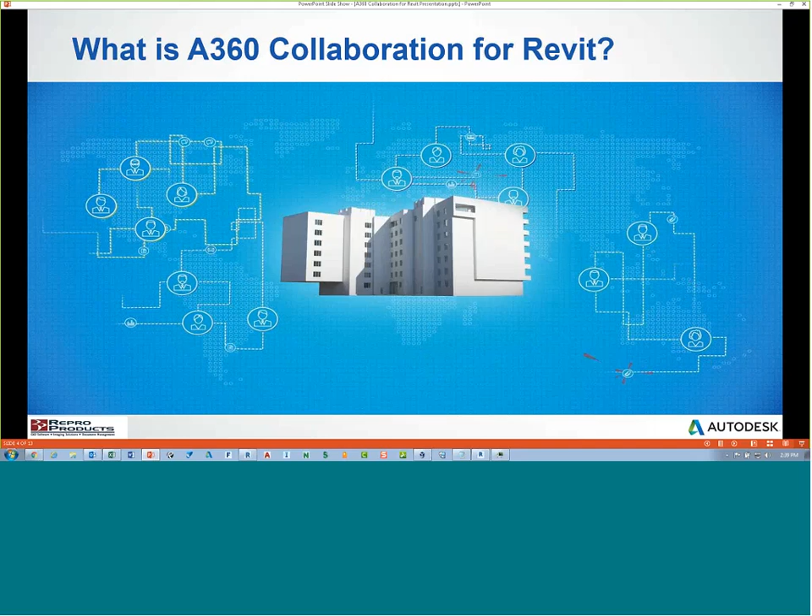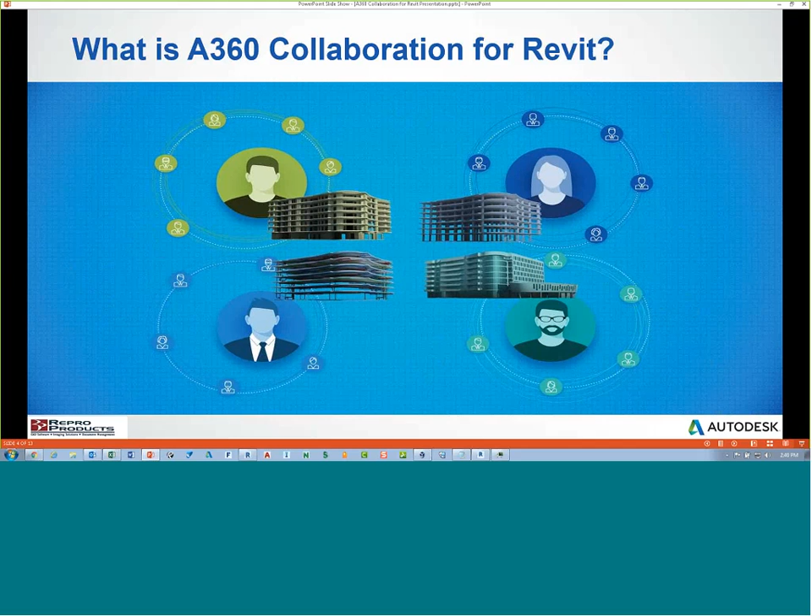There's a new reality to building design. These days, it's more important than ever that architects, design professionals, engineers, and project stakeholders can communicate and collaborate effectively. However, tools like email, SharePoint, FTP, and cloud storage sites create data silos, leading to miscommunication and inefficiencies in project delivery. Design teams need to be able to efficiently work on the same models and also share models and designs with the entire team, including non-Revit designers such as project managers, principals, consultants, and clients. But until now, the challenge has been how to do this effectively.

Collaboration for Revit plus BIM 360 Team is the solution. With Collaboration for Revit plus BIM 360 Team, project teams can work more effectively using a design process that brings everyone together in a single central workspace to collaborate and perform real-time design reviews. Collaboration for Revit plus BIM 360 Team allows whole teams, from consultants to clients, to be in the design loop from wherever they are. This access speeds review cycles so iterations can happen quicker and projects are delivered more efficiently.

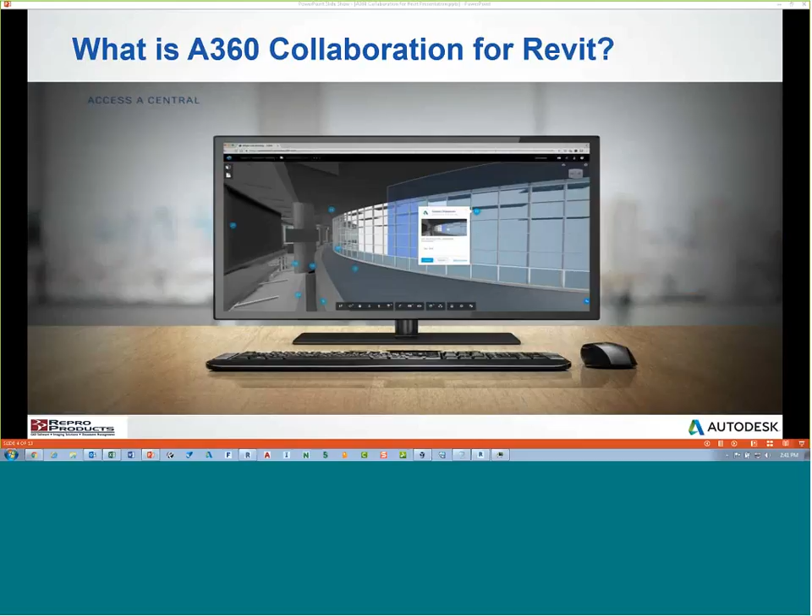Using the Collaboration for Revit cloud service, designers from multiple firms or locations can model and communicate in real time within shared building information models hosted in the cloud. Integration with BIM 360 Team makes it easy for all stakeholders to instantly access a view of the latest model and project design information. While the core design teams are working in Revit, with Collaboration for Revit enabling the concurrent authoring on the model, extended stakeholders use BIM 360 Team to access a view of the same model to review designs, provide markups, make suggestions, give approvals, or engage in secure real-time reviews.

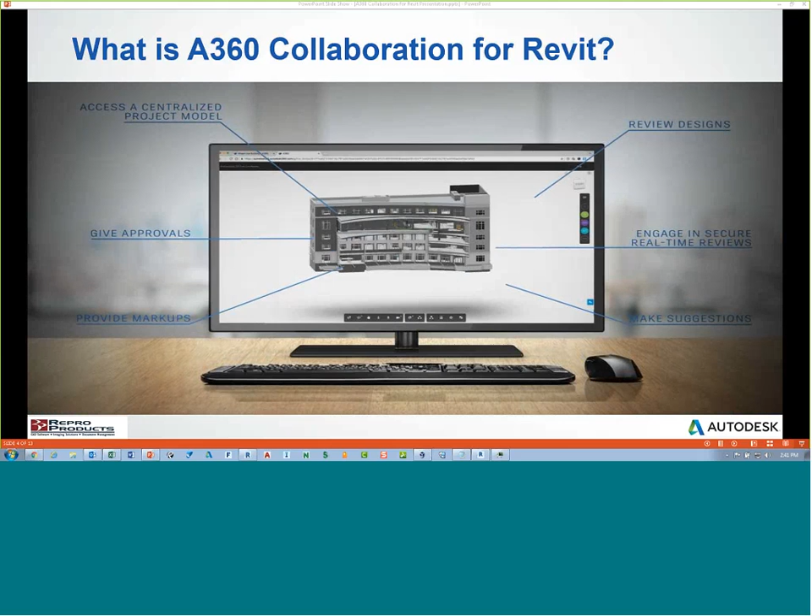And they can access BIM 360 Team from whatever device is most convenient, desktop to laptop, to tablet to smartphone, making decisions together as a single design team from any location. Collaboration for Revit plus BIM 360 Team. It's how you enable collaboration with everyone on your team to design, review, iterate, and deliver great work together.

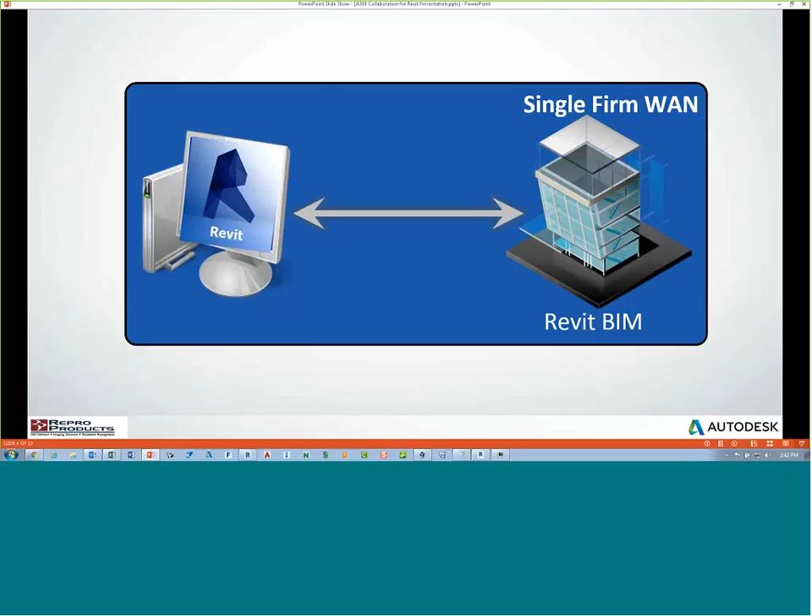When we look at the approach of Revit in a typical work sharing environment, that's within a single local area environment. And when we are working with a collaborative approach outside the local area network and get into multiple office environments, we may introduce things like Revit Server or Dropbox or some other type of cloud-based service. And when we're working with A360 collaboration for Revit, your model actually lives in the cloud on Autodesk servers. And all of your entire project data will live there as well.

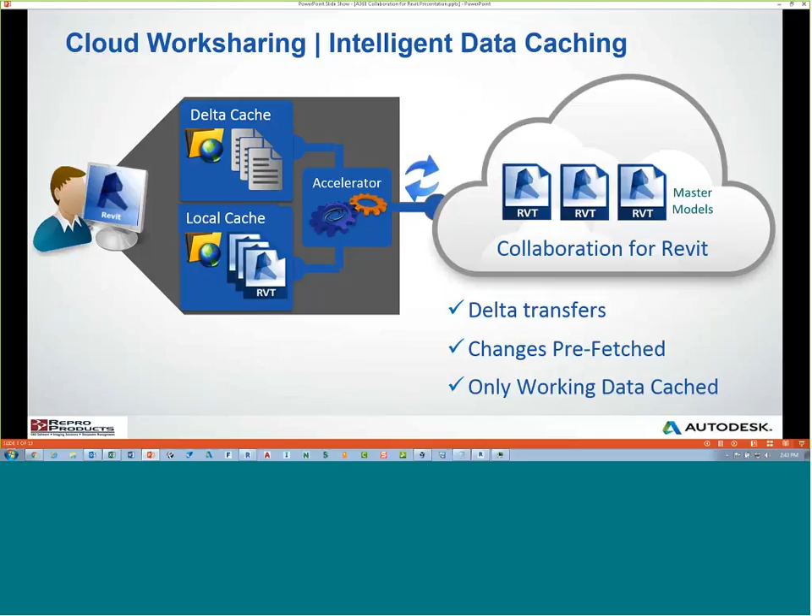And the way it really approaches the workflow for collaboration for Revit is when you install the software, it actually installs a Revit Server Accelerator on every single workstation that you install C4R on. And it also helps with only using and working with the Delta changes and any local caches to that personal accelerator. And so the recycle refresh times for transferring the data back and forth from your workstation to the C4R model up in the cloud is much faster. And in essence, it gives us the ability to work with multiple firms, multiple locations, and multiple people in a single environment.

There is a very powerful tool within the C4R software called the Communicator. And this is something that works independent of Revit if necessary, or works in conjunction with Revit, and it gives you the ability to do direct chatting, screenshot sharing, and team chat capability back and forth with anybody in the team for the project that you're in, and also for other projects that you have access to that you may not be directly accessing at that given moment in time. And there are tons of other features within this Communicator which we'll cover as well when we get into the software.

Looking at the system requirements for A360 C4R, it is a subscription-based service, so you, number one, actually have to have access to the web on that workstation. For those of you who are Revit authoring end users, in other words, you are an end user who needs to use Revit, who needs to open up the Revit model, who needs to make changes to the Revit model and save the model, you are considered an author, a Revit author. And if that's the case, then there is a cost to you for that particular user, which is $800 per year per user.

If you are a person on the team that is not a Revit authoring person, it does not cost you anything. All you need is access to that particular project hub from the team administrator, and you are in. And once you are in, depending on the level of rights that you have, you can see certain things or you cannot see certain aspects of the project.

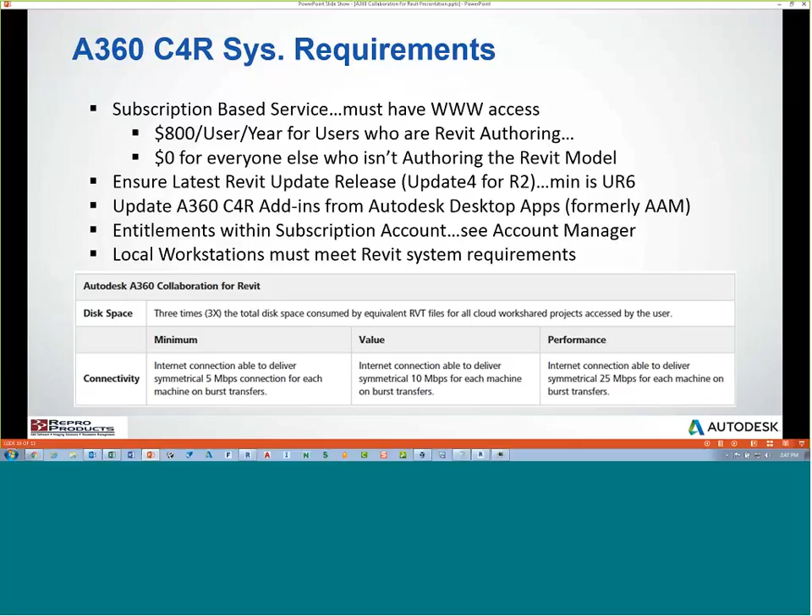There are obviously some pros and cons to A360 collaboration for Revit. The obvious benefits are any company, any domain, any end user, any location, any time in the world. That's a big plus. No IT infrastructure rework. That's also a big plus. If you don't have to have your IT network administrator go through and configure servers and Revit servers, configure firewalls, configure ports and things like that, that's a lot of IT infrastructure and headache that they don't have to touch.

And then obviously being able to collaborate and communicate the design and the design intent and all the communication data to any stakeholder in the project. It doesn't have to be somebody who's knowledgeable in Revit. It could be the owner, it could be a sub-consultant, it could be a vendor. And they can have access to your project and you can let them see what you want them to see.

There are obviously some negative aspects. You do need to have access to the web on that workstation. If you don't, you cannot get access to the hub and you cannot get access to your Revit model. And if you don't have web access, it's probably something to do with your backbone, and you just have to have IT go in and investigate. You do have to have your software on subscription, and it has to be maintained, and it has to show that you have C4R as a service listed in your Autodesk account.

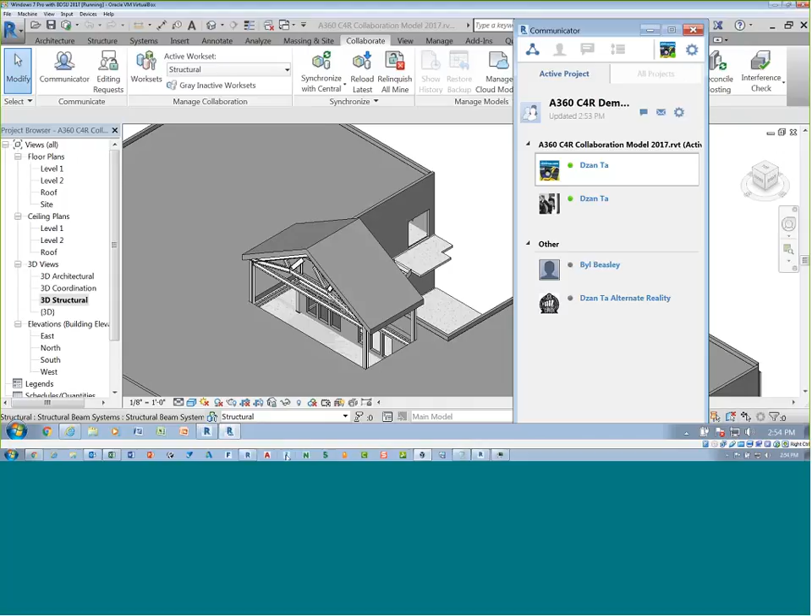So here I am in Revit. No worries, take your time. I know the audio is, whenever we do WebExes, there's always glitches here and there.

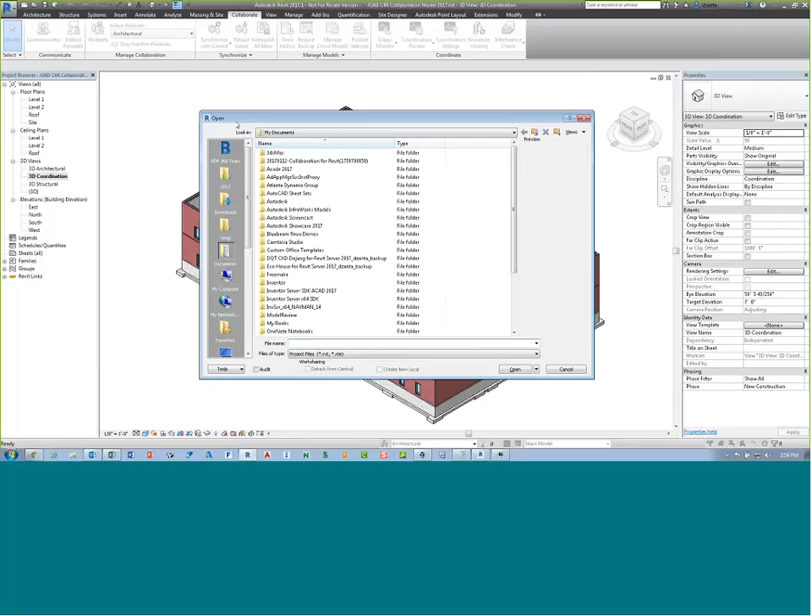So I have a Revit model here that's open up, and this Revit model is an actual A360 C4R model. How do I know this? If I go to Open and I open a project, you'll notice in the Open dialog box there is a BIM 360 team icon right here. And if you click it, it will give you access to your A360 C4R models.

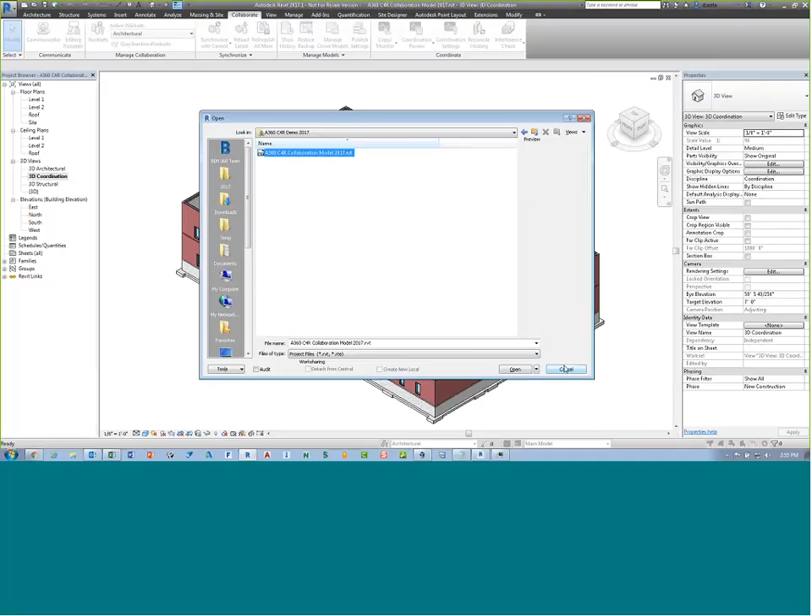And I have multiple projects and models that I have access to, so I double-click the hub project that I want to work with. Then I select the file that I want, and I hit Open. It automatically opens the file, and this is what I see here.

If I head to the Collaborate tab of the ribbon, under Manage Collaboration, you're going to see that you also have a Communicate panel. This Communicate panel has the Communicator tool, which we talked about earlier in the PowerPoint presentation, and that is this tool right here. This floats outside independent of Revit, and you can actually run it without actually running Revit if you need to.

And what it does is it gives you lots and lots of tools. It gives you a list of all of your projects, your contacts, any chatting you've had back and forth, and the timeline of data synchronization with the central model back and forth. You also have access to your account.

Just go jabber, jabber, jabber in here. And keep going. Keep trying, y'all.

And then you have a cogwheel setup button here that gives you some settings on how to display the communicator. You have 2 panels, Active Projects and All Projects. The Active Project is the one that I'm in. The All Projects is the one that lists all the other projects I have access to if I need to jump into them, or if I need to chat with somebody within one of these projects, I can do so as well.

This is the name of the hub project that I'm in. I can send an instant message to everybody in the team, or I can send an email to everybody in the team. I can click this little cogwheel, and it will open up your browser, and it will take you directly to your A360 C4R hub.

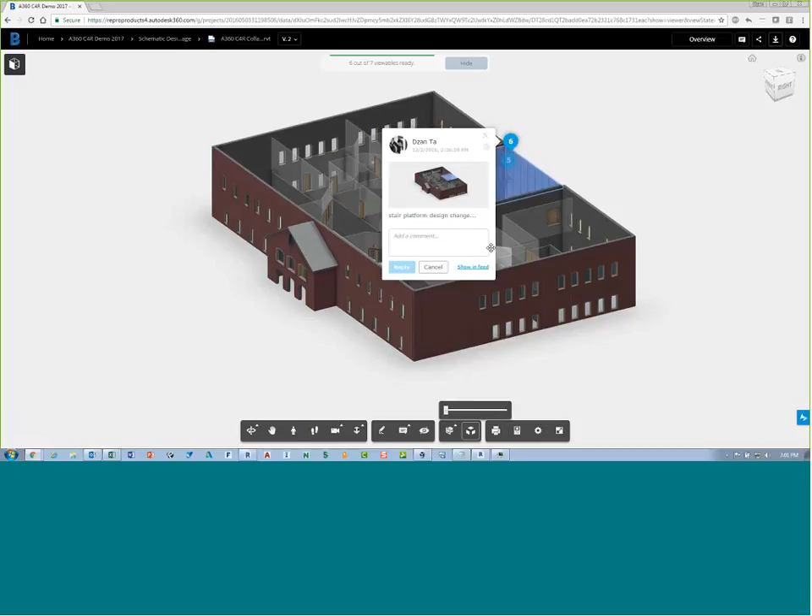Any markups that you already have, you can click and it takes you directly to that static captured image of that particular markup, stair platform design change. You can also click 'show in feed' and it shows that particular comment in the actual feed over in the right-hand corner. You can also click any other comment and it shows you that particular markup as well.

You can always head back to any subfolder or any other file that you want to. Depending on the files you're looking at and what you select, it will dictate how the viewer is going to behave, what it's going to display, and what capabilities you can or cannot do, because some file types you cannot mark up, some file types you just cannot see, and some file types have limited manipulation capability.

So I'm going to head back to our C4R, and it's very easy to create a new folder. You just click Create New Folder and give it a name, whatever we want. We're going to say Crazy Folder for Today, and click Create.

It creates the folder, and I can click into it and upload any data that I want. I can use drag and drop, or I can click Upload. If I click Upload and say Upload a file, it opens up a window, and I pick any file I want. So I'll go to my pictures, pick this, hit Open, and it gets pushed up there.

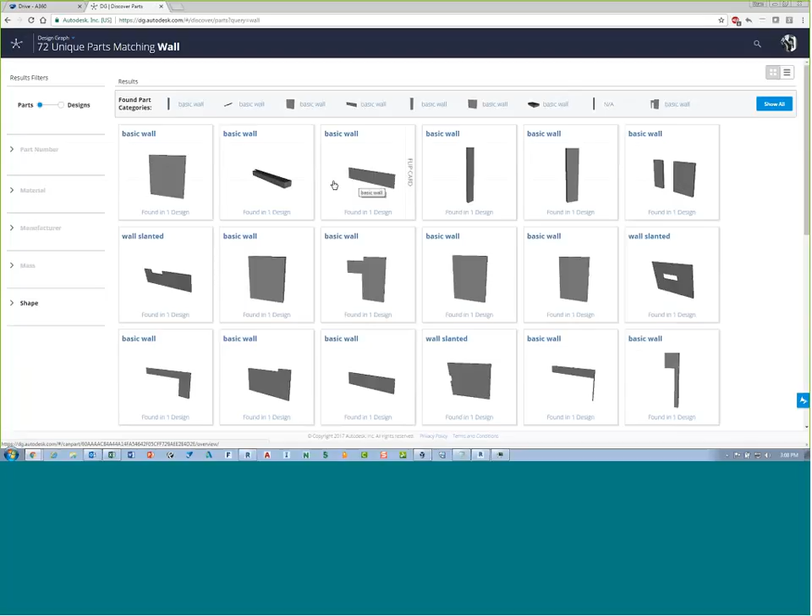You can also go to Design Graph. This is kind of interesting. This is good for those who are looking at your model from a design automation standpoint and from a manufacturing standpoint. So if I type in, say for example, wall, it's going to find everything that has wall in all of the projects and hubs. It's kind of weird, but you can do this. You can kind of look at the data.

Flip the card, yeah, flip the card, let's go. And so it lists that particular curtain wall glass being used in all of these different files and views, if you will. And that's the design graph.

So let's head back to the BIM 360 hub and back to here. I just want to make sure I cover everything from an administrator standpoint. And that's it. From an admin side, from the web-based interface side, that's it. It's very simple, it's very easy, nothing complex to it. And now let's take a look at it from the Autodesk Revit side.

See, here I am in Revit 2017 on my main laptop running Windows 7 Pro, and I have the C4R model open. I have work sets that I built, just architectural, structural. I have this one set as the architectural, the one that I have control over right now.

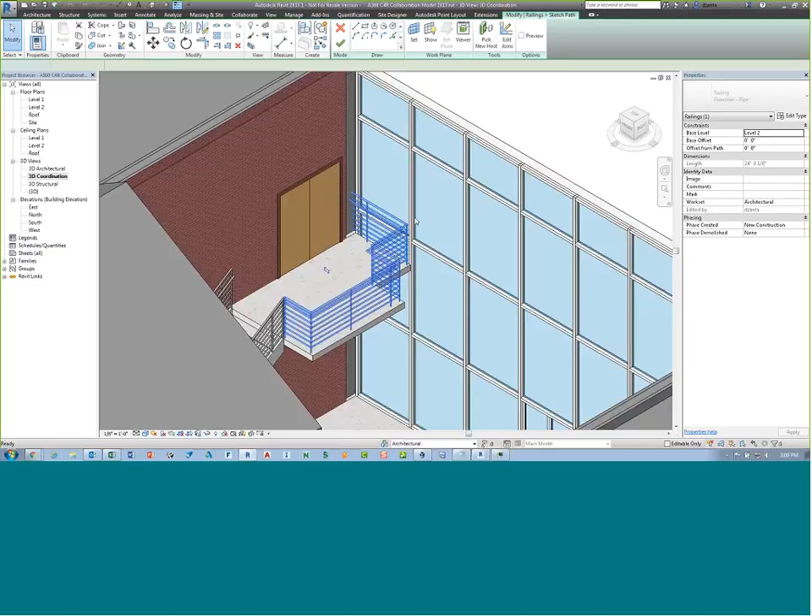If I want to go through the process of making a design change, say the railing, I can select the railing and edit that path, because I have access to and control over it, there's no problem for me to make any design changes like this. And I finish it, and then I save the file, and it saves the file locally. It's actually synchronizing to an encrypted local copy on your laptop, on my laptop, on your workstation.

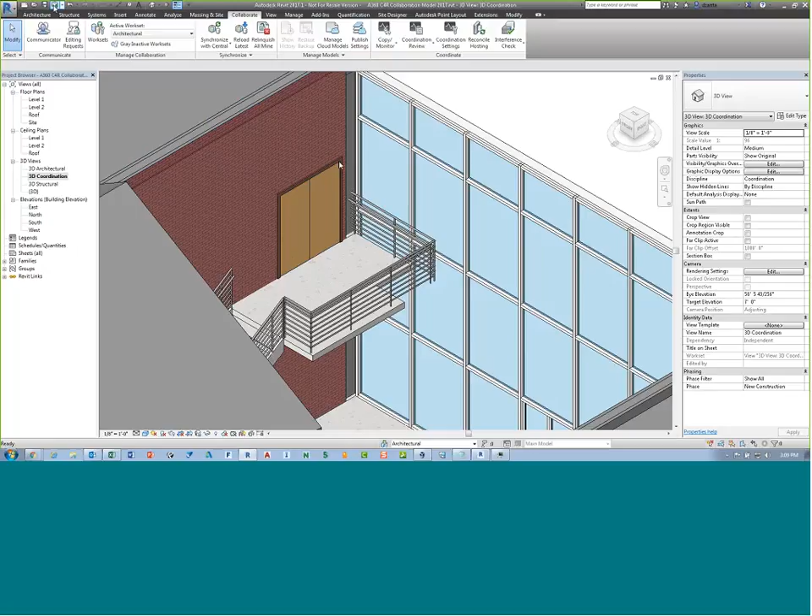And it's not a file that you can just say file, browse to, and open, because it's made up of a whole bunch of database files. And if I hit Save to Central, it saves the data back up to the central model. It's actually, you can see it here, it says 360, and it goes back to that hub, and it goes back to that particular model, and I save that data.

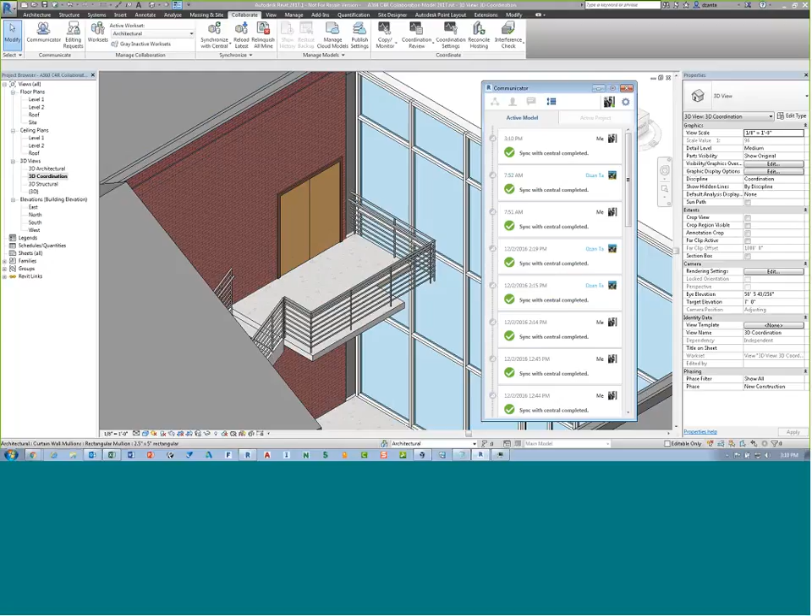Because I have the latest version of Revit 2017.1, which is actually 0.1.1, open and installed, I get a Sync with Central progress box, and it lists what it's doing. If I jump over to my Communicator, it'll show me here Sync with Central is complete, 3:10 p.m. So let me jump over to the virtual real fast and jump over to here, and Sync with Central 3:10 complete. I just did it.

It shows it here, but my data doesn't show up. So if I head over to the coordination view, I can see that my model still looks old. So I'll just hit Save to Central and let the changed data get pushed down.

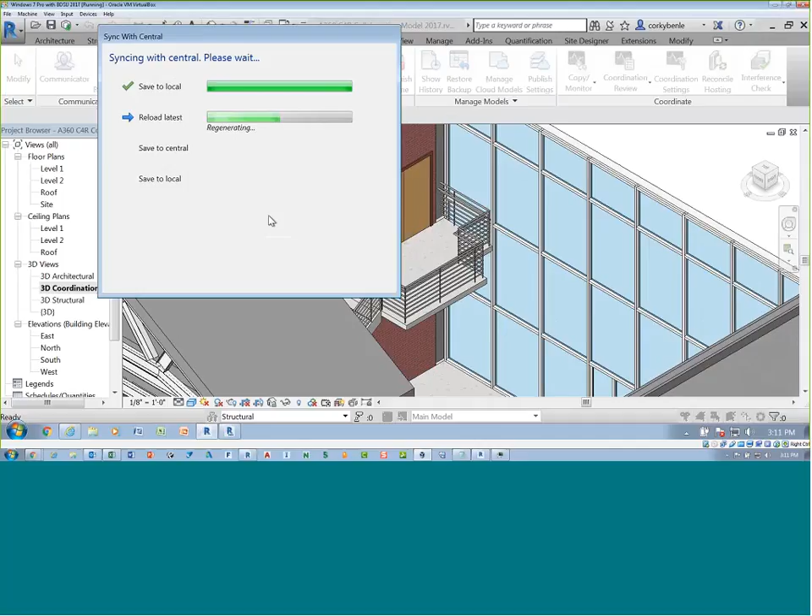And again, because I have the latest installed, I can see my Sync with Central progress window. And because I'm running a virtual of Windows 7 Pro and BDSU with Revit in it, the processing of saving to Central and getting to the web and everything is a little slower. A lot of VM software does this. So this will take probably twice as long because I'm in a VM. But you notice how fast it was in the main operating system environment.

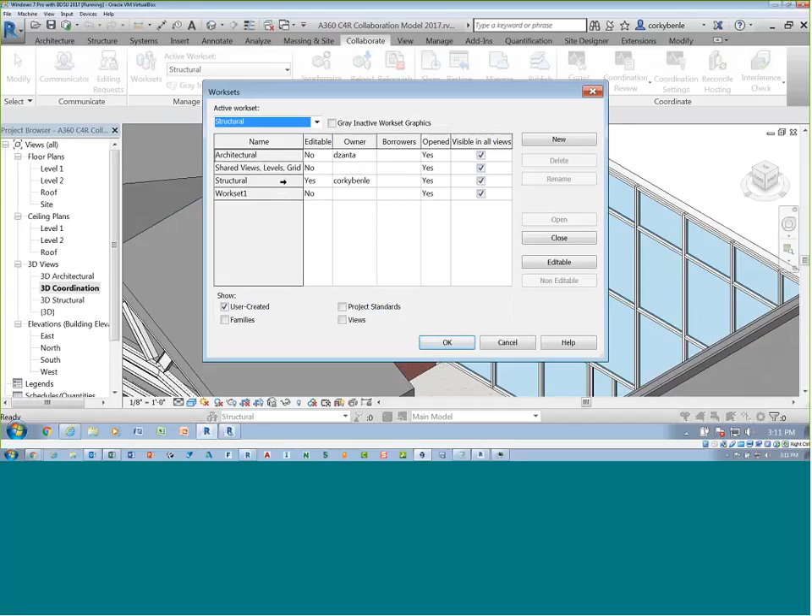Because this one is up and because I am active and running as the structural work set authoring person, I have no problems with authoring this slab here to adjust it, to fix it. And I can do so without a problem. This is no different than you working on a regular Revit model with work sets.

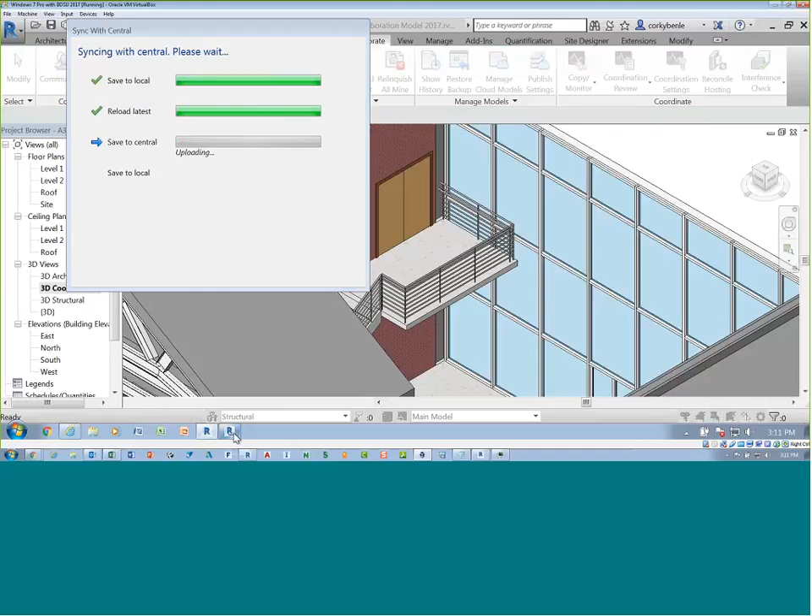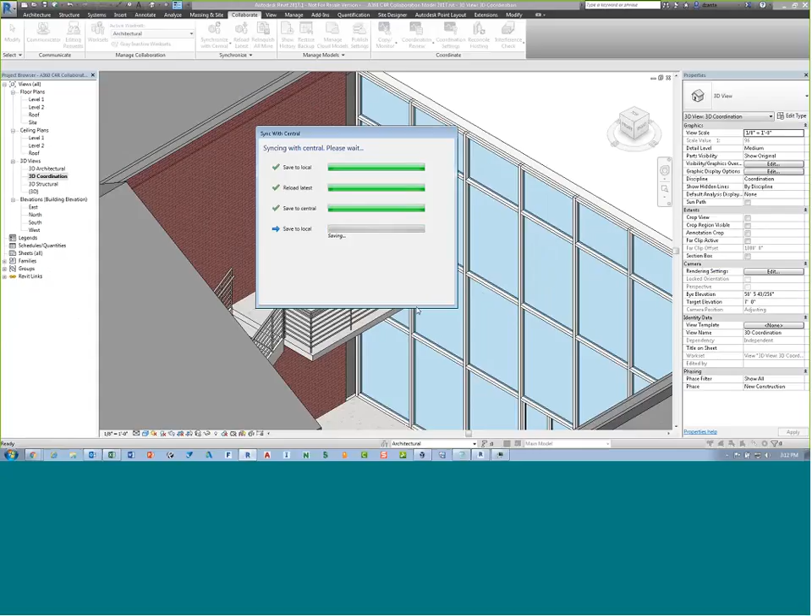And I save the file and I save back to central, hit OK, and if I look at my progress window, you're going to see that it's syncing, see? And it says that it's done. So if I jump back to my main Revit file, in my main Windows 7 Pro OS, and I hit Save to Central to get the changed data, it should show up quickly. And it's done. The window will pop away, and I'll see the change.

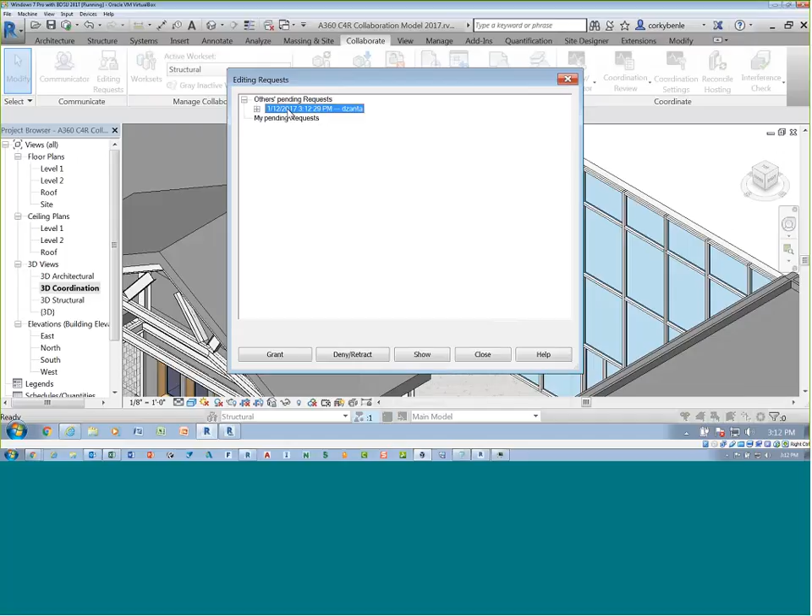Now, what if I want to make the change to the structural slab? I don't have ownership of it, but I can always send a request. And this is, again, nothing different than working with Revit with work sets in any other fashion. And so if I head over to the virtual environment and over to Revit, I can see that I have an editing request here. There's that editing request. I can grant that.

And then if I head back to my main Revit, in a few seconds, it should pop up saying I have access to that. There you go. And it also highlights that location as well, see? So I now have the ability to modify this and then fix it or change it to whatever I want. Maybe I want to make it curved for some reason.

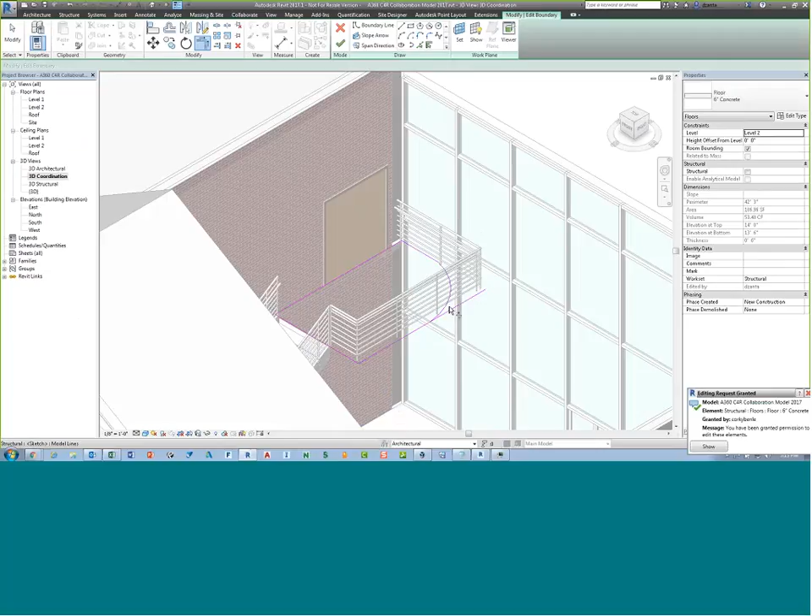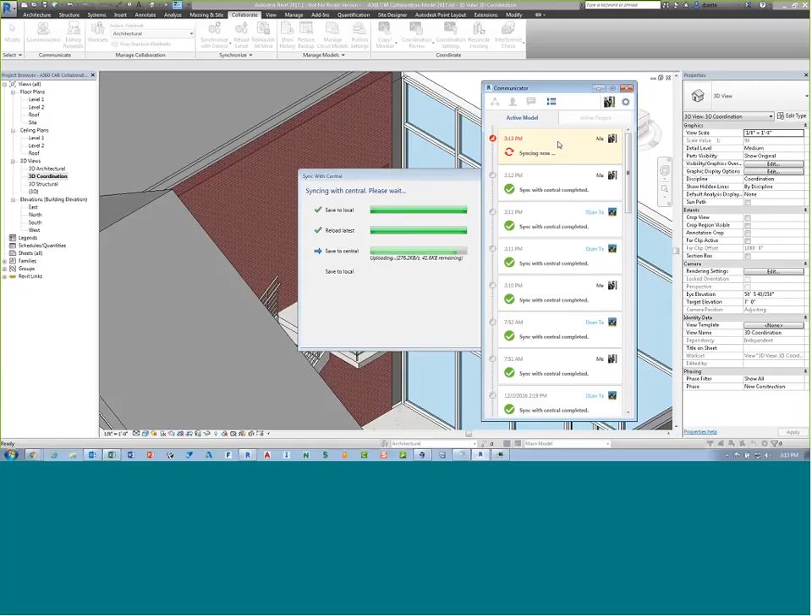And I'll clean up this here, clean this up, finish this, and then modify this as well. And clean this up and finish it. So I save my work, save it back to central. It saves the data. I can see the data getting saved. Okay. And again, if I jump back to my virtual and I hit save to central, I should get that changed data.

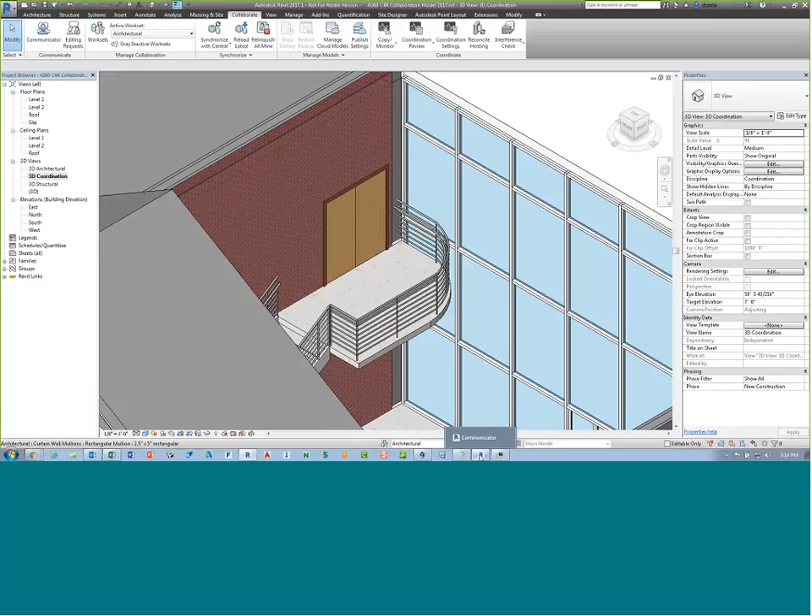And again, because I'm in a virtual environment, it takes a while for it to save just because it's processing through the network card and a bridge connection. But while it's doing that, let's head back to the main Revit from the host and the Communicator, and let's look at this a little bit. So the Communicator has icons for your projects, your contacts, your chatting. So I can go in here and I can see the chat stream of all the chats if I need to. And even not just that project, but any other project that I have access to as well.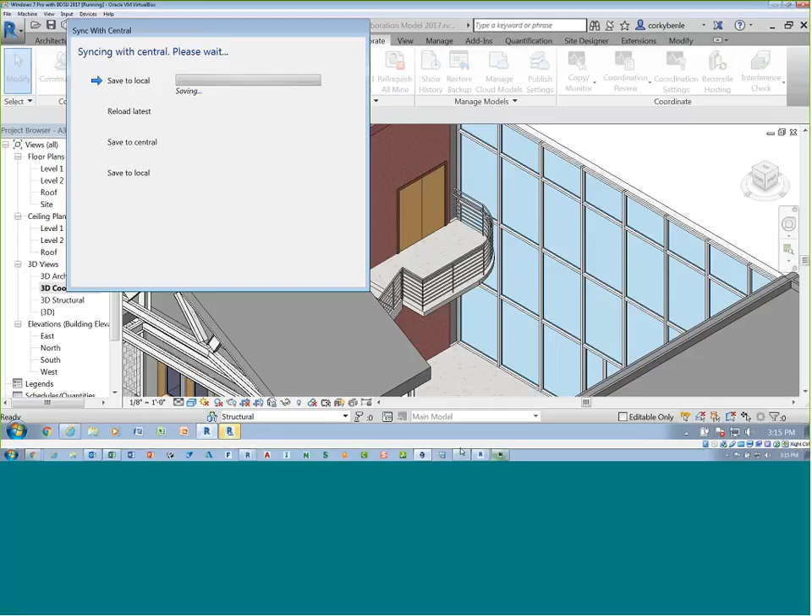And then obviously the Communicator gives me a list of what's going on synchronization-wise. If I double-click this particular user's icon here, I can start chatting with that user. I can say, hi, how are you today? Did you get my design changes for the slab? And it automatically pushes it there. And then back over here, I get my alert. And if I go over here to my Communicator, there's my message.

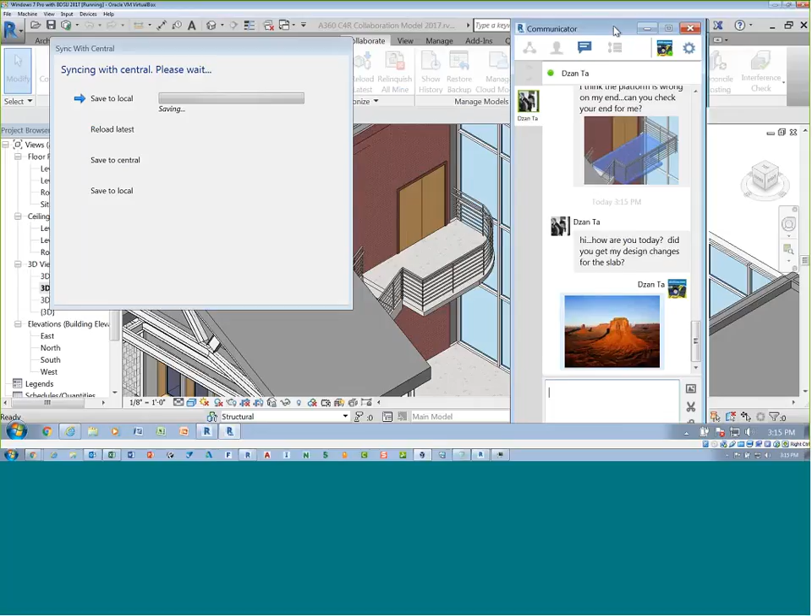And there you go. And so I can reply back by even sending an image if I want to. And I can go ahead and get an image. I have a sample image here. And I hit enter, and it gets pushed. Or I can also capture the screen, a certain area like this, hit enter, and it gets pushed. So then back over here in my main Revit with my Communicator, I should see that information update automatically. So it's very easy to do this.

And I can also click send a file. And I can send a particular file that I want to, say this one. And it sends the data up automatically within that Communicator, and the other end user in the virtual environment should see it right away.

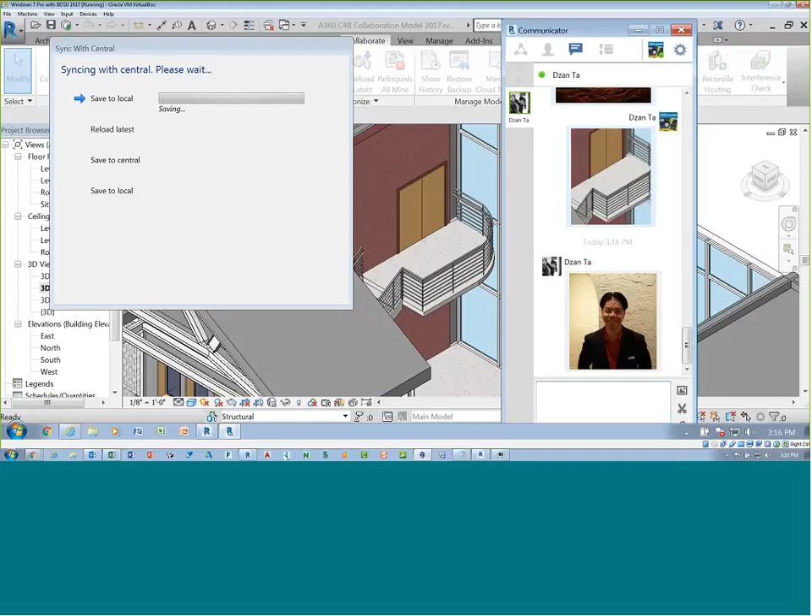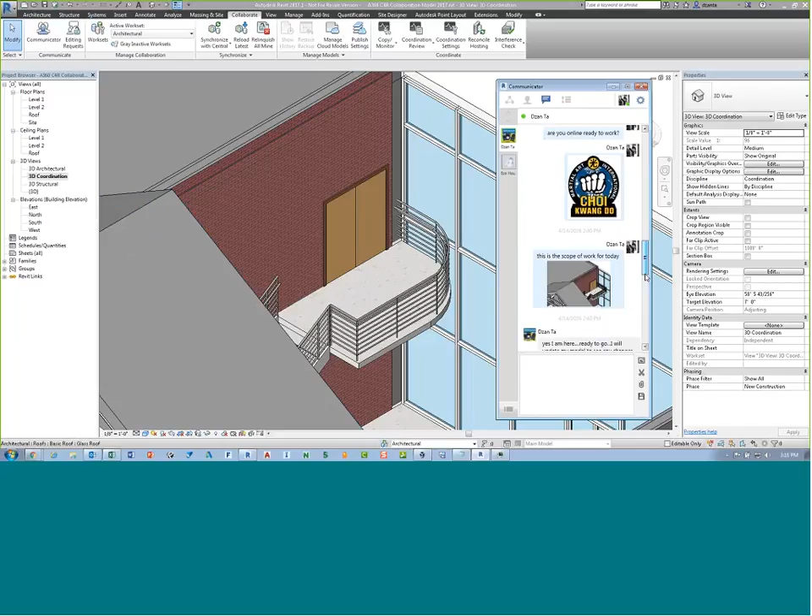Now, in regards to the Communicator and the stuff that you're putting up here, be very careful. You cannot delete anything. You cannot alter anything. You can export the data. You can export out the chat history. Okay? But you cannot get rid of any of this stuff. So for those of you who are using C4R and using the Communicator, don't put any things in here like personal stuff or stuff that isn't proper for an office environment, because it is going to get captured. Let's see what else.

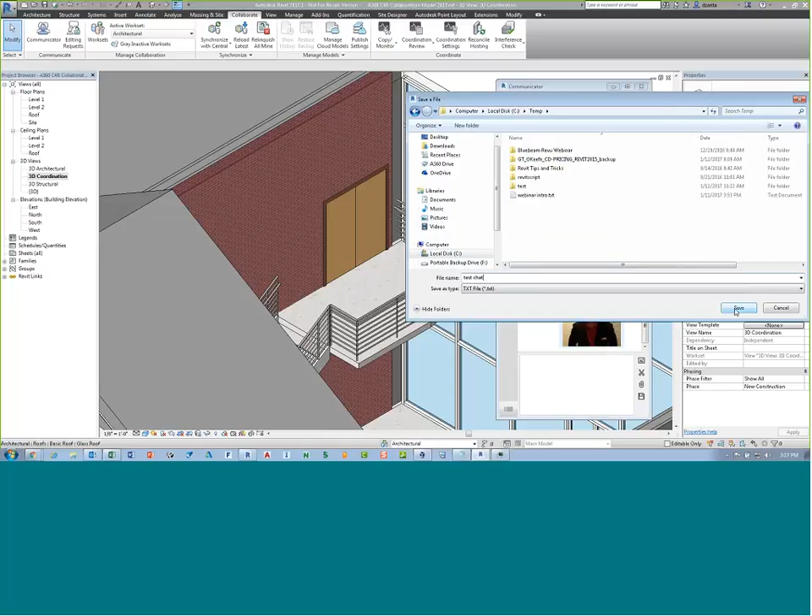This one sends an instant message to everybody in the team. This one sends an email to everybody in the team. This click gives you access to the actual hub. And here's a list of all your contacts and frequent contacts. Here's your communication stream. So if I want to export out the chat history, I can click this and save it as a text file wherever I want. So let's save it under C, under temp, and we'll call it test chat. And I'll hit save. And if we open up that particular location,

there's the stream. Now, it doesn't capture any images. It only captures the text back and forth. Okay, it only exports the texting information. It doesn't export any images. But at least it gives you something to work with. Okay?

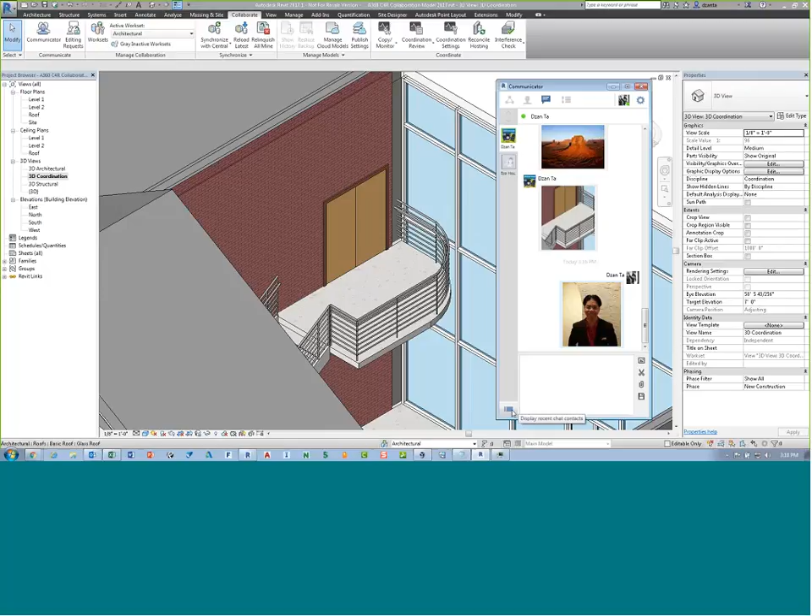And then, covered that. And then if you need to, you can always tell other people within the Communicator that you're busy, and your icon will go red, and so they know not to bother you. But if you leave it as available, then people can see it, and then they can chat with you if they need to chat with you on the current project or any other project as well. And then this is an icon that lists all the chats that you've had in the past, versus this one is a list of the chats that you're working with.

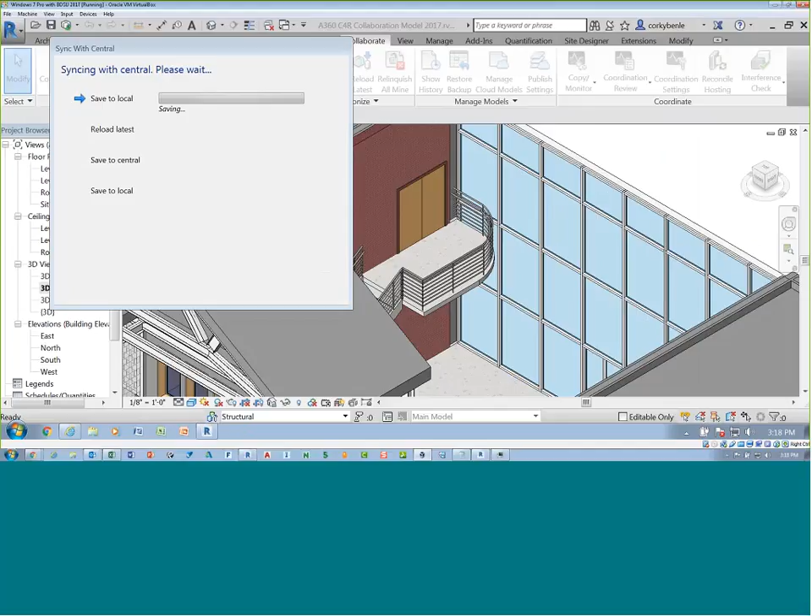If I need to get out of the Revit file, I just get out of the Revit file like I normally do, and I relinquish all my control like I typically do, and I'm back out. Any Revit file that's a C4R file is going to have a little icon of a cloud in the lower right-hand corner here, okay? Whereas others won't have it. And then over here on the virtual side, I have an issue with my saving here, which is not a big deal. We'll just kill it, and get back in if we need to.

So that's a really quick, rough presentation on A360 C4R and the capabilities of what it is within the hub here, the project side on HTML-based, versus on the Revit side as an end user, and as a second end user, and how to work with the data back and forth. Oh, almost forgot. Let me jump back into the model.

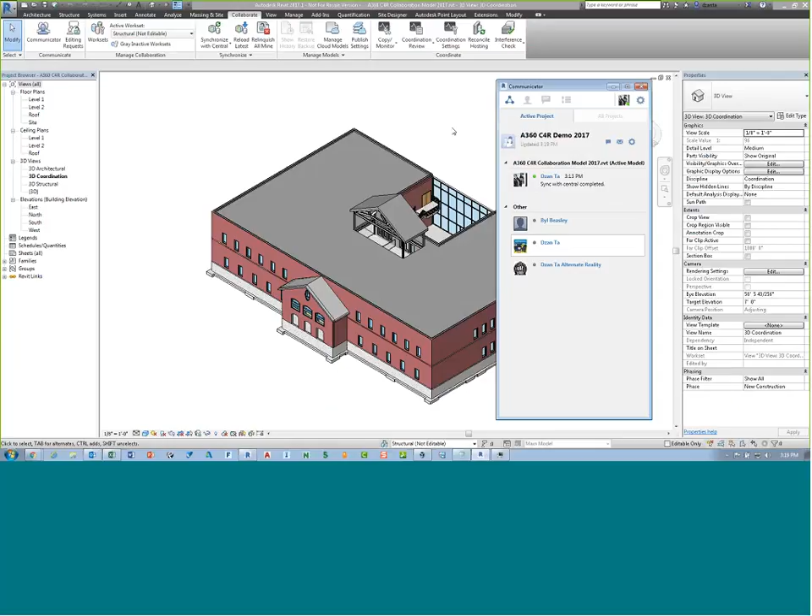You notice that when I open the file, I don't actually have to worry about opening up a local copy. I just open the file. The A360 C4R is already doing all of that for me. I don't have to worry about that anymore. Okay. Under the Collaborate tab, there's also a Manage Models panel. And in here, you have the ability to manage your cloud models. And it lists the Revit models you have access to and the projects you have access to.

So I'll click that one. And you'll see it says A360 C4R.RVT. That's the file we're working with. And I can upload the latest edition. And I publish it. Now, because I'm publishing it, that's the information that is visible for others to see when they're in the hub. And it's really meant as a static snapshot for end users who don't have Revit and they just want to get an idea of what's going on with the project and where it stands, and if they need to make markups of it, they can.

If I click Publish Settings, I can get into what it is publishing. For example, Set 1 is publishing all of these views. That's it. And it's similar to the print dialog box and what options you have for printing. So same thing here, you're publishing those particular sheets or views.

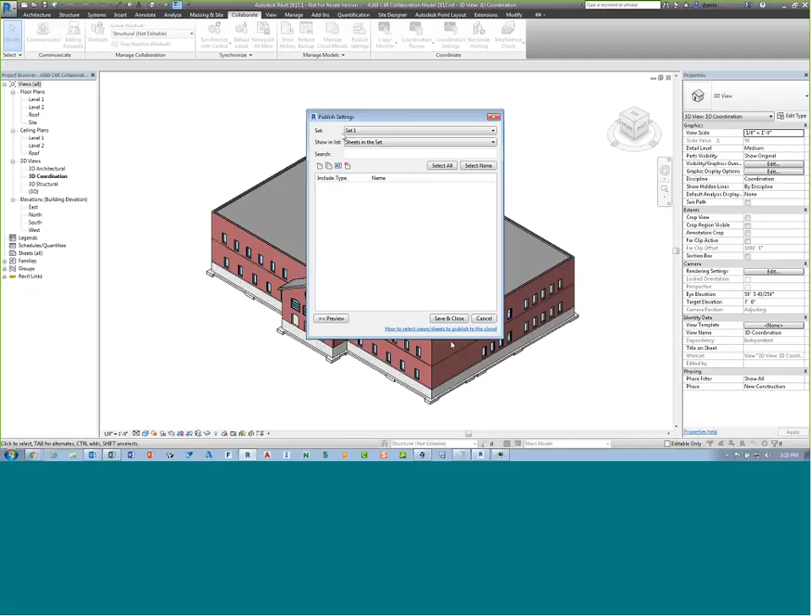So if I say sheets in the set, I don't have any sheets in this set, obviously, so it's not going to list. But if I want to create sheets, I can go ahead and create a sheet. And we'll drag and drop a view onto a sheet. And then we'll go back to Publish Settings, and we'll say Sheets.

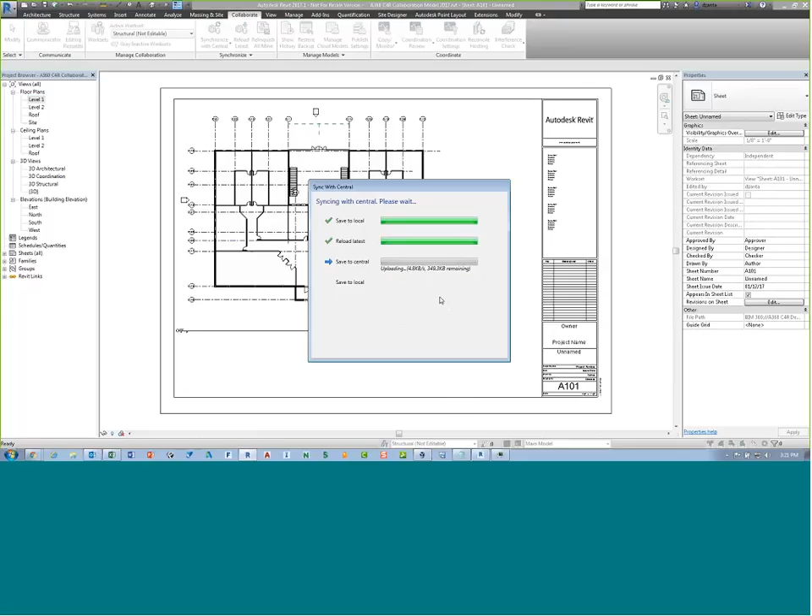Oh, because I have not saved, that's why. So I can't publish that unless I actually do the work and save the file. So save the file, save back to Central. And then if I go back here, I should see it.

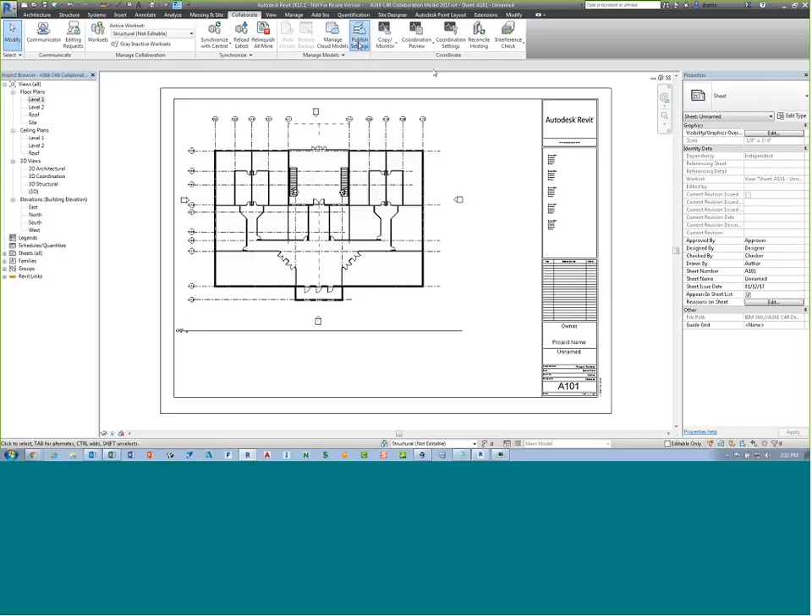Let's go and manage that. Let's push that back up again. Oops, sheets in the model, my bad. Let's push that up real fast. And go back to, come on. And back to you, and sheets in the model. And pick that, and save and close, and publish that as well.

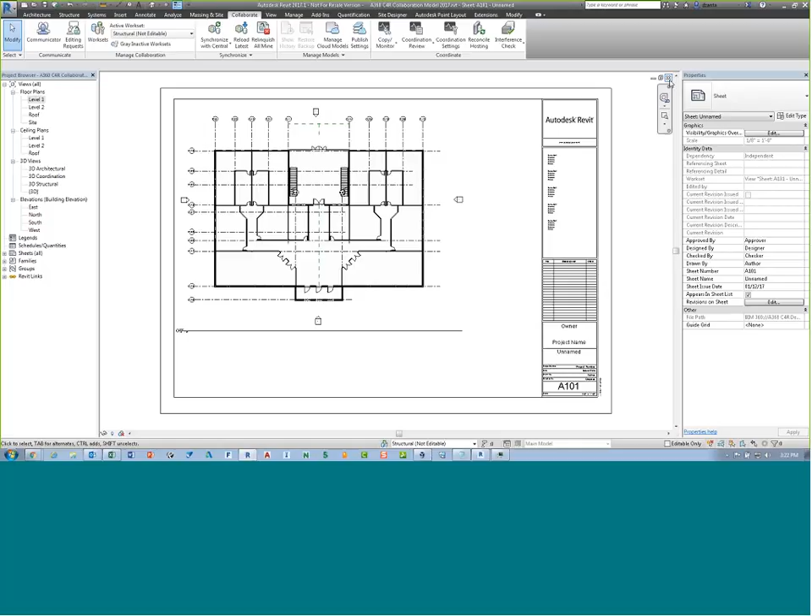So it's not terribly hard, as you can see. You just have to be a little careful. I'm moving kind of quick because I'm starting to run out of time on my presentation. So, what else? That's it, really. That's a really good rough intro on C4R and how it functions on a web-based hub portal and within the Revit software. I'm going to leave it open right now to questions.

You see, I've noticed that whenever I update my model, it shows up the update in the Communicator, but not on A360 Hub. Is there a way to have A360 update automatically? Is it only a manual update? So I have a question coming in here stating that an end user is already using C4R on a particular project, and that when they update the model, it shows the update in the Communicator, but not on the A360 Hub. Is there a way to have A360 update automatically, or is it only a manual upload?

In this instance, for publishing, it is a manual upload. Because remember, the model and the stuff that you're looking at on the hub is for presentation and collaboration communication purposes. That is a non-Revit authoring functionality, if you will. So you have to manually publish. So since I did several publishings already here in Revit, if I go back to my hub, then I should be able to go to schematic design stage, and now I see V4. See that? Because I uploaded it, published it twice, so now it shows V4.

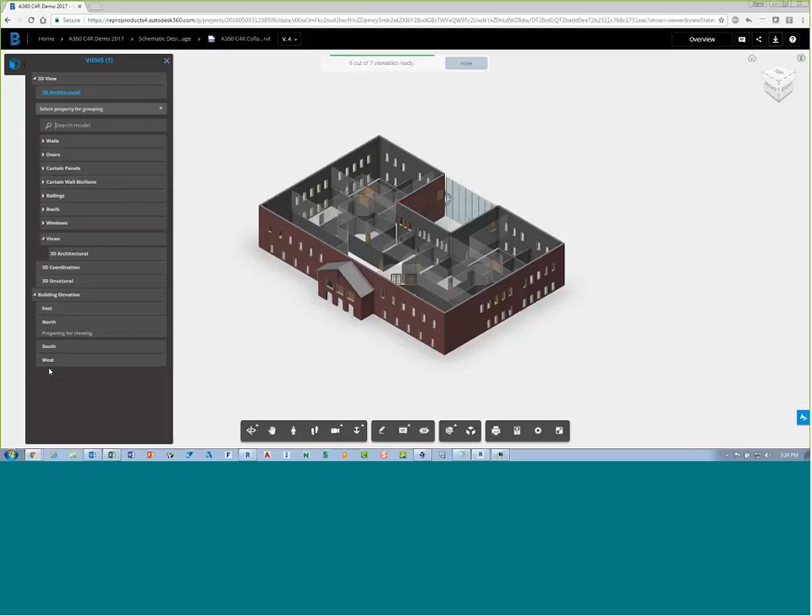And if I go in here and I look at that, see, it's starting to upload and show that data as well. And also, you have several views, north, east, south, west, 3D views. And let's see, does my sheet show up yet? It might be a timing thing as well. Walls, doors, windows. So it looks like my sheet hasn't been updated yet. It's still processing this one. So I think it's just a matter of time for the information in the hub to update and synchronize properly for viewing and markup and editing. Good question. Other questions?

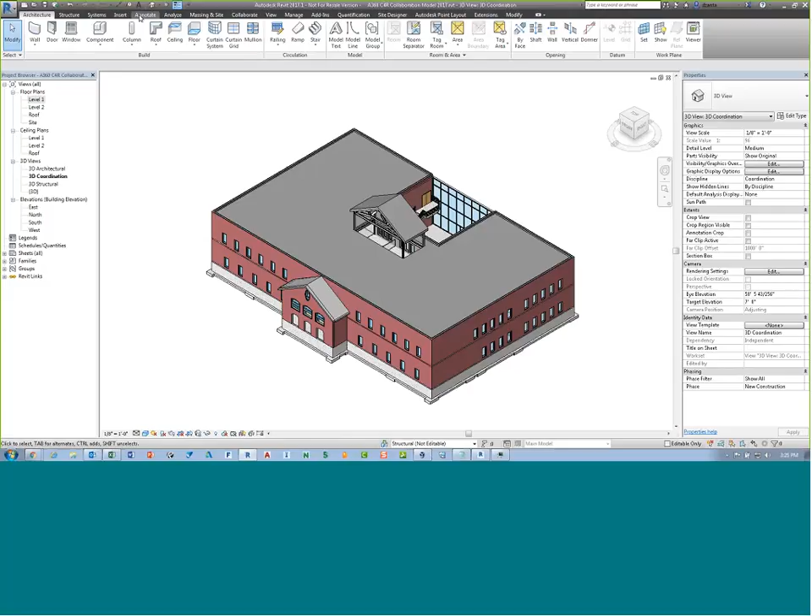Is there a way to put a keynote file on the hub and link it to the model? It seems you can only put the file on your local workstation. That's a good question. Let's head over to Annotate, Keynoting, Settings. It looks at this particular keynote file. If I browse and I try to point it to another keynote file, I cannot get access to the BIM 360 hub from here. There is an external resources. Nope, you cannot do it.

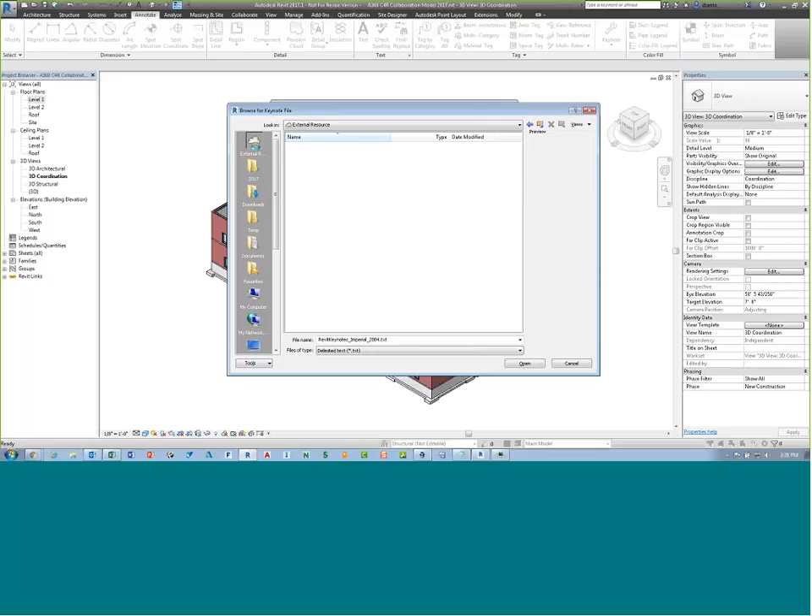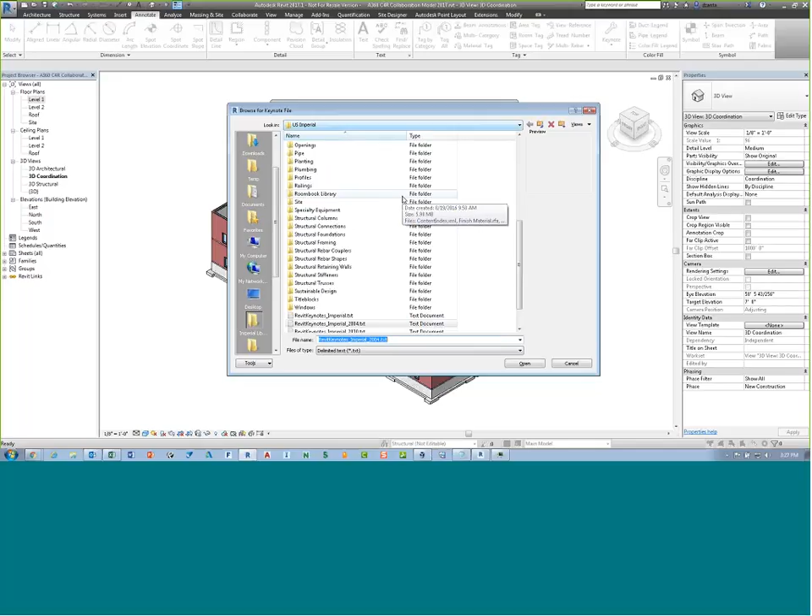If they put in the BIM 360 team link icon here, like they do when you do the open command here, if they give you this access here in the keynoting link, then you can do so. But because under keynoting, under settings, it's looking for it, and you can't point it to that. You just can't. So that's a good question. I can understand why you're asking the question. That way everybody works off of one keynote that's on the hub and not on each particular workstation. And that way the CAD BIM manager or IT network administrator doesn't have to put this keynote file on every single workstation or on a central server location. Any other questions?

Well, this is good. I actually finished within the time frame. The last 2-3 times I did this, I actually ran it well over. So I tried to be cognizant of you guys' time. I know you guys are just as busy as I am.

So if you are a Revit authoring end user, somebody who needs to open up Revit, who needs to get to this hub to get access to this file, that is when it costs you money. That's when that particular person needs to pay.

Let's say your office has a team of 10 people on a particular project, and of the 10 people, 4 of them need to be Revit authoring people. You only have to pay for those 4. All the other 6 can still have access to everything on this hub, provided you give them the correct rights. They just can't go into Revit and do the authoring and saving back to Central. Does that make sense?

So the question is, I don't need a seat to add file folders or change the files. All others can see the model in the viewer. Correct. You do not need to pay $800 per year for an end user who just needs to access the hub to create files and folders and push up data. The Revit file itself is the one they cannot touch or work with from within the Revit software. They can work with it from the hub by opening up this published model. This is a static model, not the actual C4R model that you see here. Does that make sense?

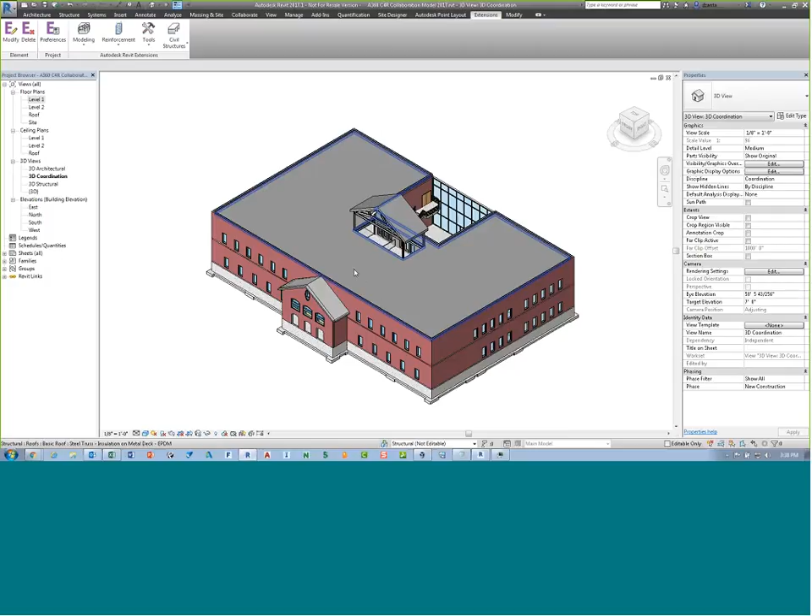So using the viewer, I can go in there and make a comment. Yep, exactly. You can use the viewer to look at any file you want, and you can comment on a point, say over here. Let's mark this up, put in a cloud change over here, and save it. There's my markup. Or I can go under comments and add a comment, like 'check the wall join connection on grid line 7.' You can do this because it's really just marking up a static image, if you will.

Another question: if only the architects have Revit, but the consultants or other collaborators only use AutoCAD, they don't need to buy Revit because they'll only access the hub C4R as a viewer, correct? Yes. The architect has the Revit software, so they buy C4R and pay $800 a year per user to author the Revit model. The consultants and collaborators only using AutoCAD don't need to buy C4R and pay $800 a year. You just invite them to your hub, and they have access to everything except the authoring Revit C4R model. They have access to the published static C4R model we're playing with right here on screen. That's it, good question.